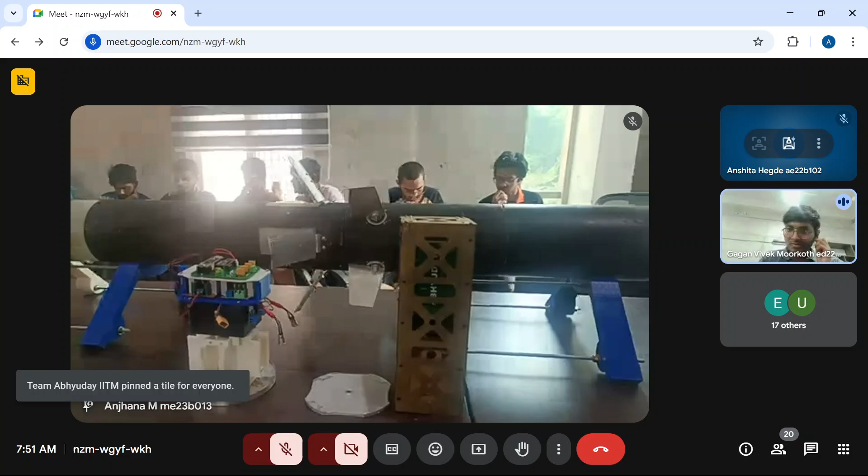What we are basically trying to do is, when we are recovering the rocket back with the help of a parachute, we are trying to take in air through suctions, sample the constituents of the air, and then send it out. This payload, which is in form factor of a 3U, is going to perform that task for us.

Anjhana, can you focus on the canard system once? You can go to the other side of the table. You can make it landscape and move a little back. You can relax, it's fine.

You can see a canard and air brakes bay over here. If that's clear, can you confirm it's clear in the video? Yes, I can see it.

So we have a canard bay, which is a modification of last year's bay. We tried to make some changes.

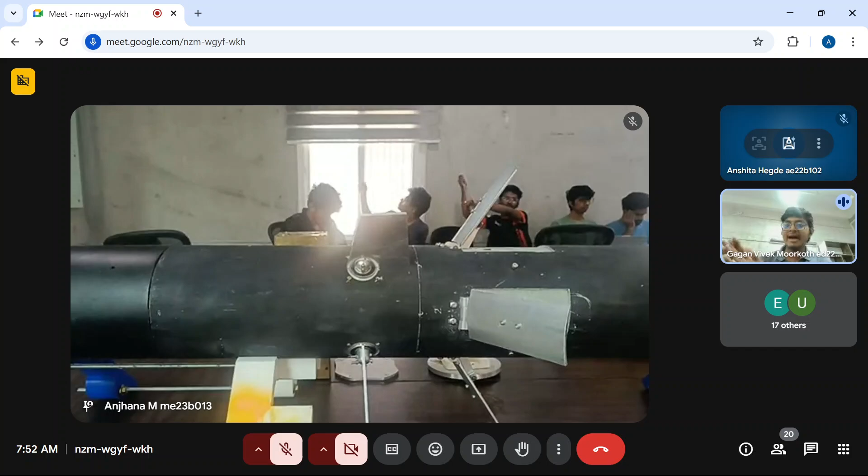Yes, I can. So the canard bay is a modification of last year's bay. Last year's canard bay failed, as the canard snapped off after a few seconds of launch. So we realized why that happened and made some structural modifications. At the same time, we also updated our software, basically the way we predict the roll and the way we control it.

Apart from the canards, we also decided to implement air brakes in this year's rocket. So the flaps you can see over here next to the canards are for air brakes. So this is the canard and air brakes bay.

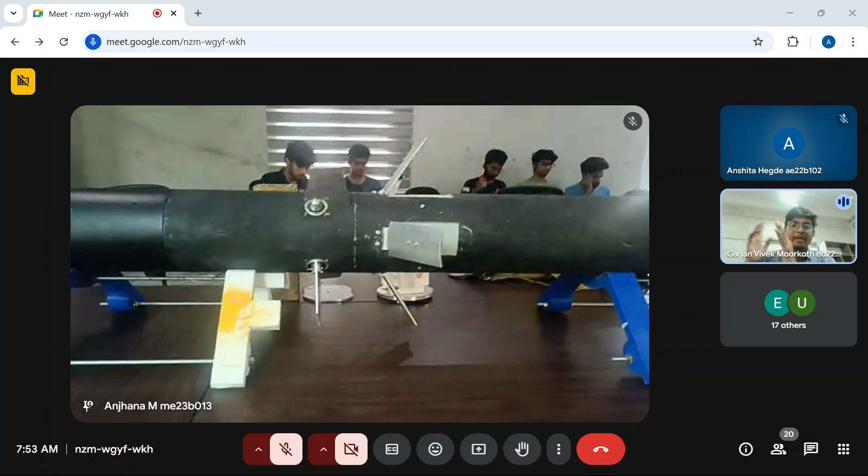Now, Anjhana, can you move back a little and zoom out? Following that, we have our recovery bay. Above the canard bay, we have our payload bay, then we have our avionics and recovery.

Anjhana, can you come to the oxidizer tank right now? Over here we have a nitrous oxide oxidizer tank. If you can come back a little more, we have a lower structure which will house the engine, and then we have the fins of the rocket.

So for this year's element, the fins are currently filleted. We are yet to perform a tip-to-tip layup of the fins, which we are about to do in the next couple of days. And at the end, we have a boat tail.

The boat tail is made out of aluminium. The rocket is primarily made out of carbon fiber, the internal couplers are made of glass fiber, the engine is made of aluminium, and the tip of the nose cone is made out of aluminium.

Now, if the externals and the brief overview are clear, we can dig into each vertical. We can come from top to bottom and detail everything about the rocket.

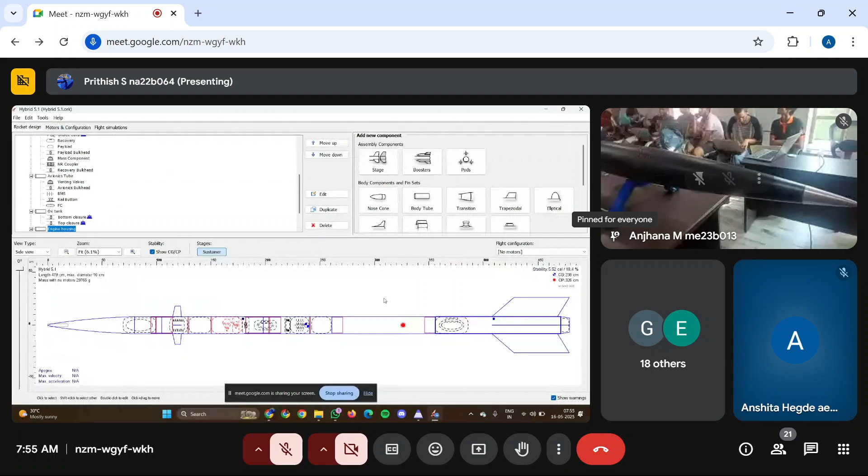Yep. So this is the OpenRocket file in which we have designed the rocket. Oh, am I not audible? I am audible. Okay, so this is the OpenRocket file on which we designed it.

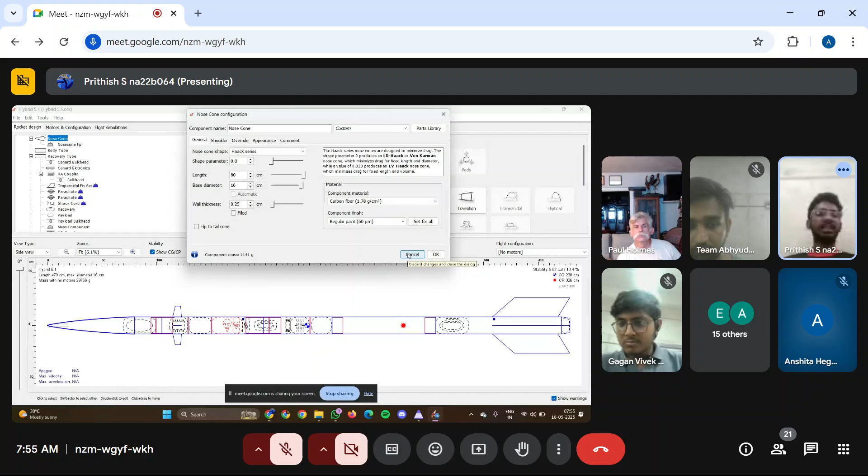So like Balaji mentioned, the nose cone is of a von Karman profile with a fineness ratio of 5, and it's given a wall thickness of 0.25 centimeters, 2.5 mm, which is regular for any kind of composite you go with. And like Balaji mentioned, the tip is aluminum for easier manufacturing.

Then, the nose cone tip is about 25 centimeters in length, and there's a nut inside the nose cone which holds the tip in place. So inside the nose cone is where we'll be having our payload.

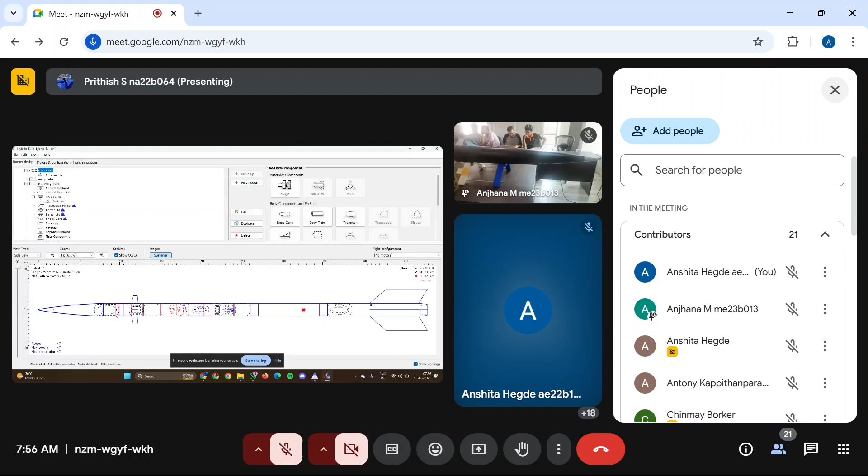About the nose cone, after the von Karman profile, we have extended it by 30 centimeters, and on the 30 centimeters there's a coupler.

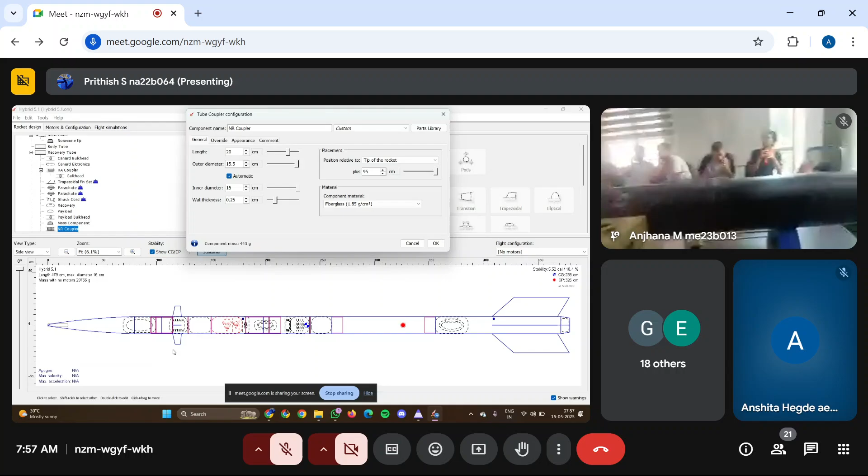The outer diameter of the coupler is around 155 and inner diameter is 150. The coupler is also 2.5 mm thick. On the coupler, 5 centimeters from the edge of the airframe, which is the nose cone, we have a payload bulkhead. That is the payload bulkhead we have designed, on which our payload would be sitting.

We also have cut edges so that we can epoxy nuts onto the other side while we are integrating the coupling of the two tubes.

Going down from that, we have our canards bay, which will be further covered by the control system, and below which we will have the air brakes.

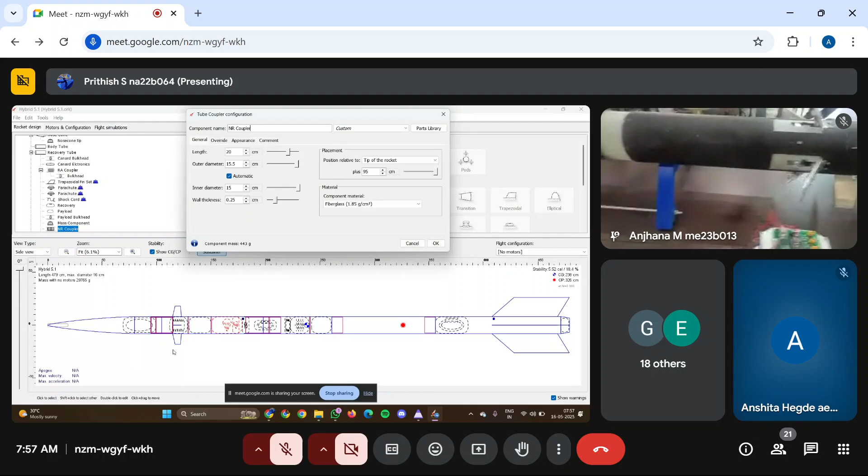Going below that is where we have a recovery bay. As you can see, there is the coupler over there, that is the point of separation for the rocket. The bay is about 53 centimeters in length, and it will hold a 12 feet Rocketman parachute.

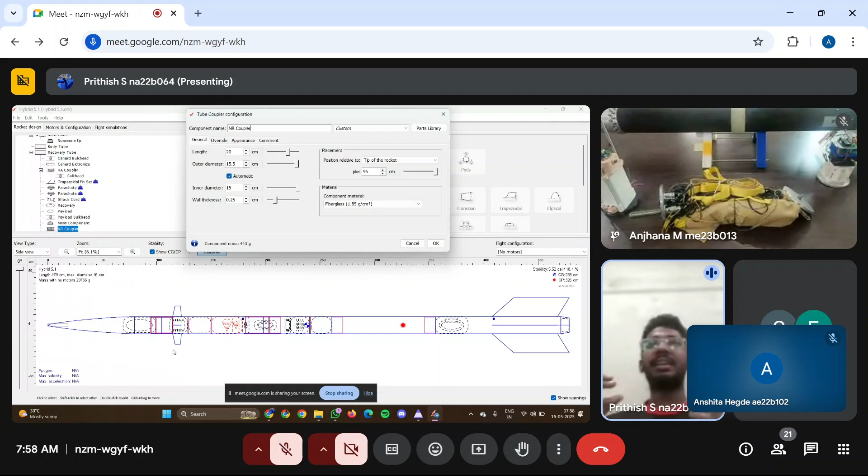The deployment is a single deployment, but dual event. At Apogee, the parachute will be deployed using CO2 canisters as main, and we also have a redundant pyrotechnic charge that we will use to deploy in case our CO2 mechanism fails.

On the table we can see the parachute packed along with the reefing wire and shock cords. Also on the bulkhead, we have our recovery system, the CO2 recovery system, and another tube for keeping our pyrotechnic charge. Below this whole assembly is where we'll have our rocket avionics.

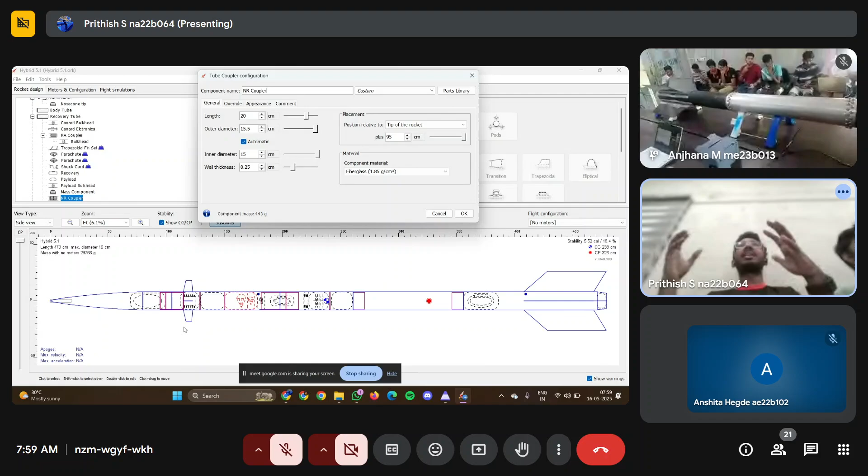This consists of our COTS and SRAD, and below which we'll have our aux tank and the vent assembly. Below the aux tank is where we'll have our engine and our feed assembly.

The fins of the rocket are right now just surface mounted, as in they have a 2.5 mm thick thin slab that will just go in, and right now it's filleted. For strength reinforcement, we are using about 4 layers of carbon fiber to reinforce it, tip to tip layer. For retention at the back end, we will have a boat tail.

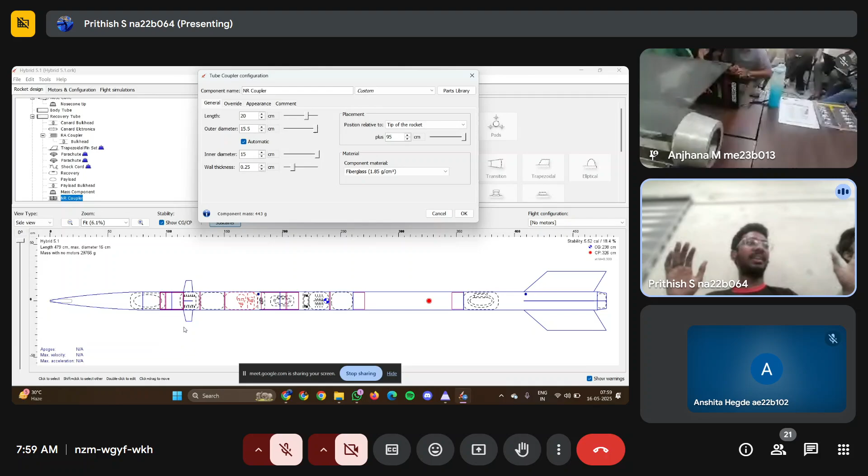So this is the complete overall look of the airframe and the recovery systems. If you have any questions, just let me know.

Where are your electronics located, and what is the airframe made of? The nose cone and the engine housing, that is the foremost end and the aftmost end, both of them are carbon fiber. The fins are carbon fiber. The two tubes in the middle, the recovery tube and the avionics tube, are both glass fiber. All the couplers inside are also glass fiber.

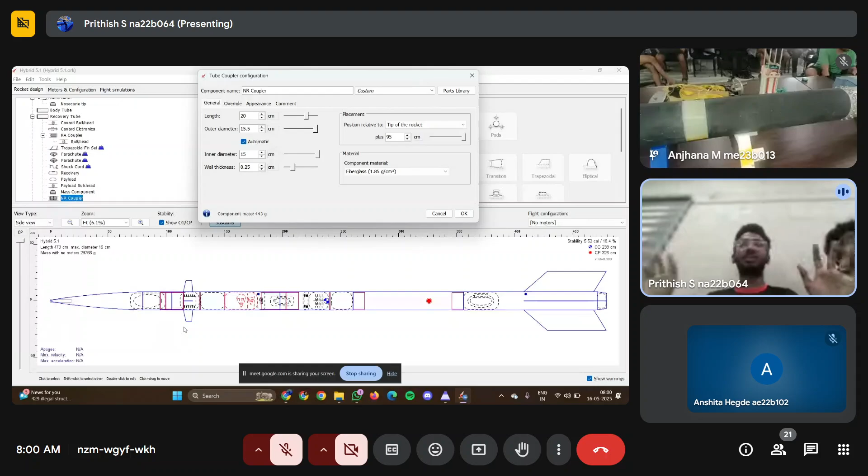I just wanted to make sure you didn't have carbon on your electronics. Yes, yeah, I know it's something you should know, but just wanted to make sure. I will hand it over to controls.

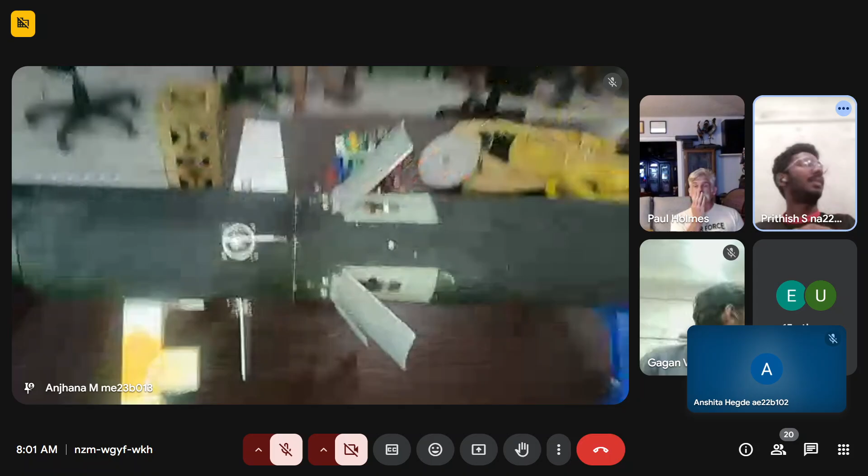Hello, can you guys hear me? Hi Paul, so this is the control system for the rocket. As Balaji mentioned previously, last year the canards sheared off at max Q.

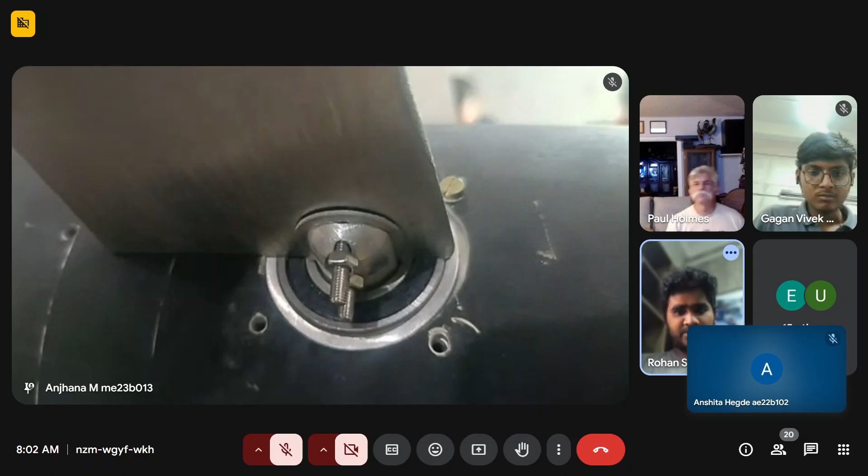To counter that, this year we've added bearings and made a custom holder for the bearings. I'm going to zoom in on that adapter. As you can see on the canards, there are bearings attached to support the loads it will experience during max Q, so all the loads will be taken care of by the body tube.

Below this, there's a bulkhead to hold all the canards, electronics like the servos and all the sensors. So this is the full electronics and servo assembly.

Below this we'll have the air brakes. The air brakes are actuated by a lead screw and a stage, and we have a DC motor below it. The motor will rotate the lead screw and the platform will move up and down, which will push the air brakes in and out.

To support this mechanism, we have four linear rods going through them, which will provide structural support while the air brakes are being actuated.

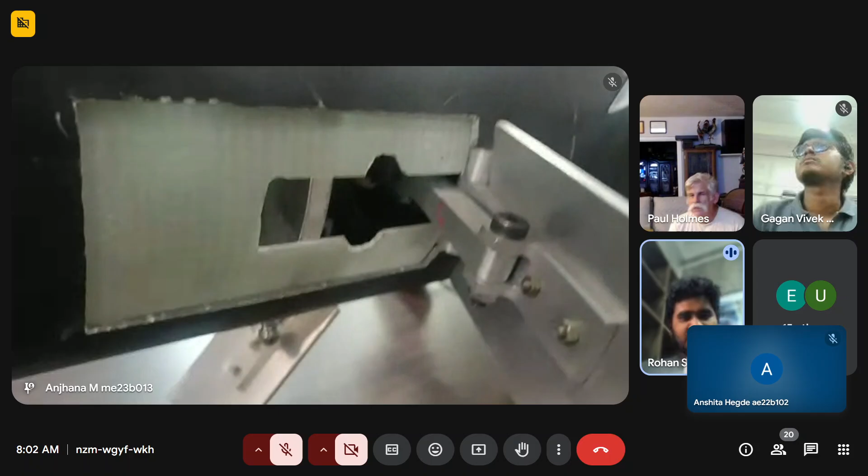If one of those air brakes fails, do all the rest stop? It's designed such a way that one of them will not fail, but in case they do fail, they will return back to their zero position. Okay, that sounds okay. Let's hope they don't fail. Let's hope they work.

So this is all about the controls part. If you have any questions, I'll be happy to answer. No, no, it looks straightforward to me.

Thank you. Also, just to touch on the fail safes, we have implemented a few fail safes. In case any of the canards breaks off, we will be able to detect it and bring all the others back to their zero position, just to get rid of any pitching. You always have a fail safe. Yeah, sounds good. That's all about the controls part.

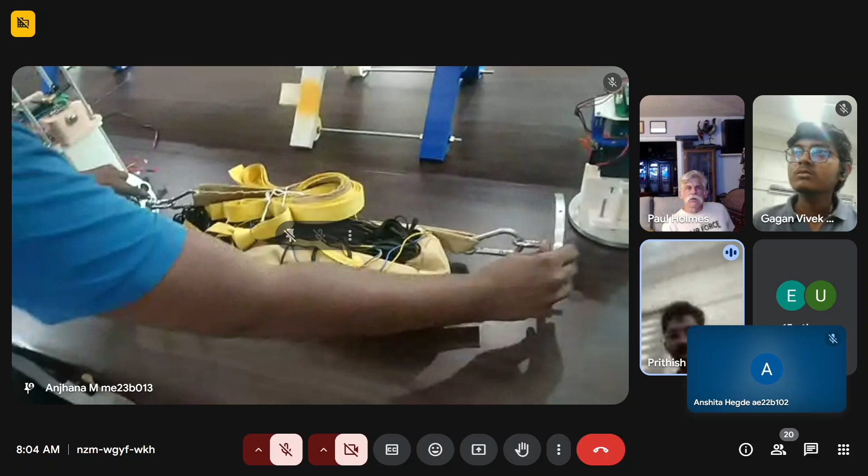I forgot to mention properly about the recoveries part. When it comes to the mechanical links, I'll show the pillar. On one side, we have a quick link connected to an eye bolt. On the other side, we have a U-bolt, a swivel link, and a quick link. Those are where the shock cords are attached, and about L by 4 of the shock cord is where the parachute is located.

Instead of tying the reefing line to the main line, we tied it to one of the shroud lines of the parachute, and we've also stitched loops in the parachute, with the reefing line going around that. The reefing ratio is 1.72, meaning the 12 foot parachute would be constricted to a diameter of 7 feet. There will be two Tinder Rocketry Piranha cutters.

One cutter will be connected to the COTS, and one will be connected to our SR avionics, so that just in case one of them fails, the other one fires off. The whole parachute will be packed inside the deployment bag, and outside the deployment bag we'll be stitching line stows so that the shroud lines are properly, neatly packed outside the deployment bag.

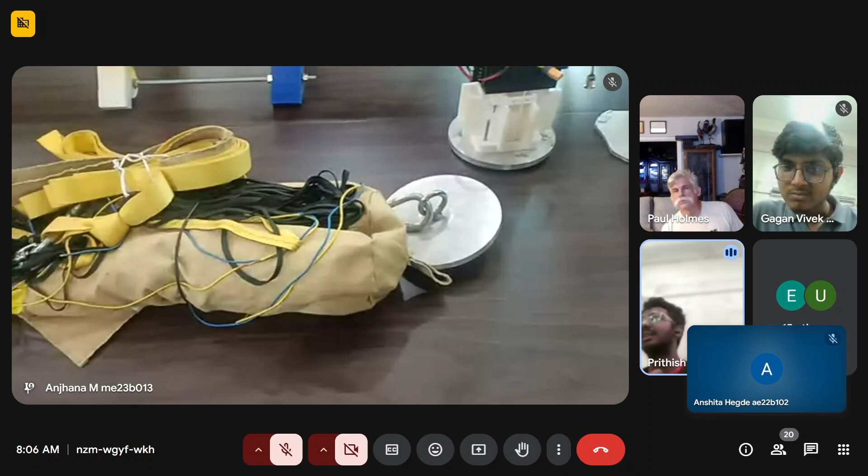And yeah, that's about the parachute deployment system. Okay, thank you.

As I mentioned, last year we went with a black powder recovery, but this year is the first time we're also trying to implement a carbon dioxide canister based recovery system.

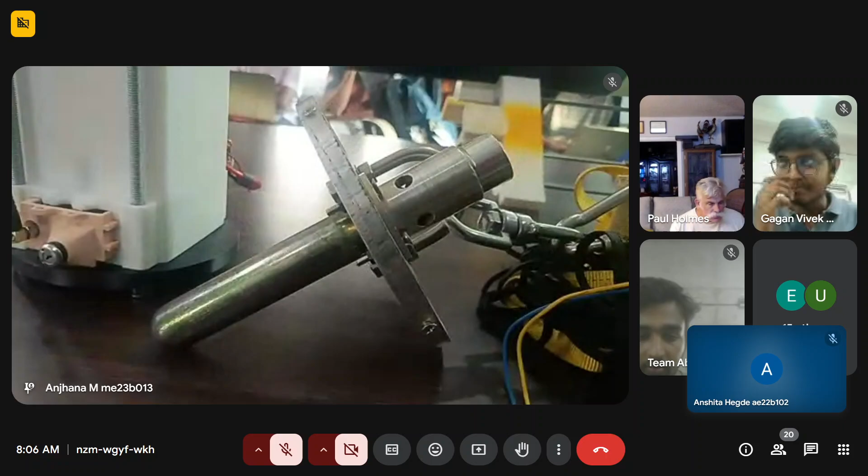So you're using one carbon dioxide and one black powder? Yeah, that's it. Okay. Yes. Sounds good.

If the system so far is clear, we'll now dive into the avionics bay and the flight computer. Okay, yeah.

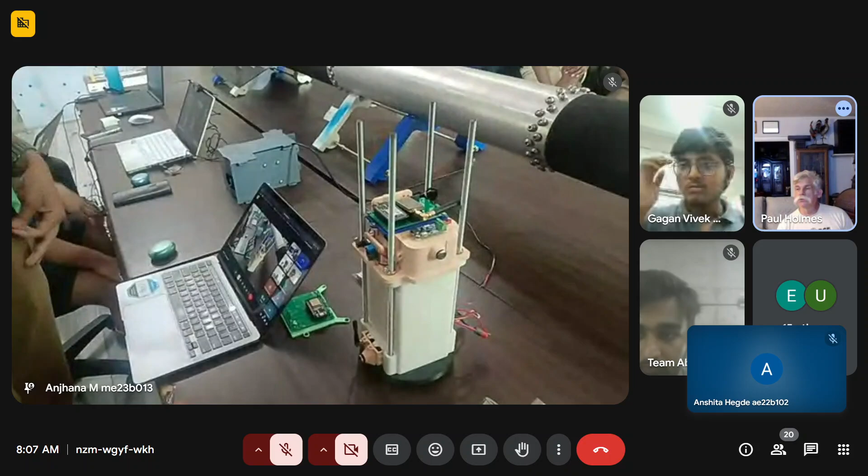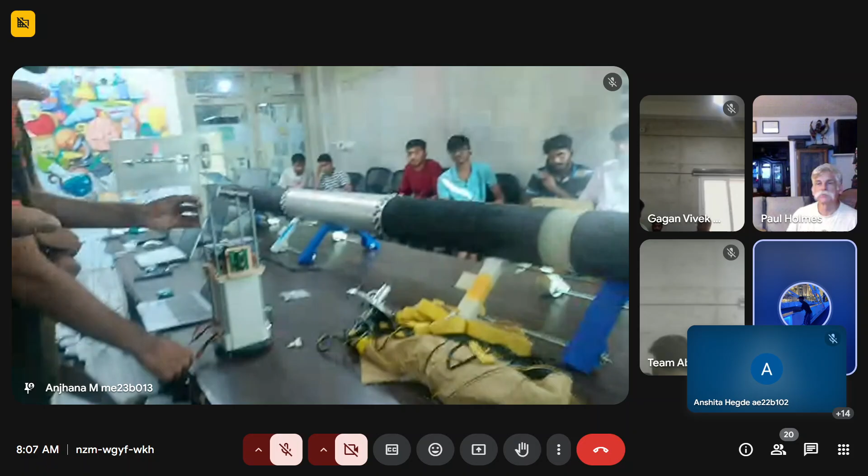Hello, Paul, hope we are audible. Hello, yeah. So as you can see, this is our avionics bay, and it consists of main components, which includes... can you keep it? You're very faint, can you see it properly? I can see, I can't quite hear though, it's very feeble. Can you hear me now? A little bit, yeah. Try talking, try talking now. Yeah, yeah. I connected it to me. Oh, shit. Hello, can you hear me? Oh yes, now it's better.

All right, so this is our avionics bay, let me go through the PCBs involved. This is our SRAT flight computer, and this is our SRAT telemetry PCB. This is our COTS altimeter, which is Blue Raven. And this is our battery bay, consisting of two 6,000 mAh, 12.8 volt lithium ferrous phosphate battery packs, which are BMS included. When combined, they produce over 24 volts.

And if you can see on this side, this little cabin consists of our... your audio died. Hello, can you hear me?

Now I can, yes. So as I was saying, this is our COTS GPS tracker, which is featherweight, powered by its own singular cell. All these components are powered by a 2s2p configuration of lithium cells. They're housed inside, and these are the wirings that involve them.

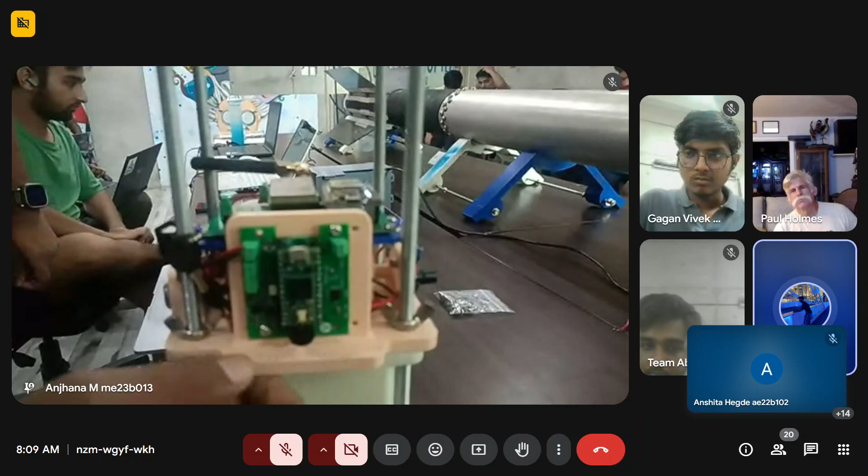When it comes to the FC, it has a myriad of sensors, including a BMP388, which is an altitude sensor, an ADXL375, which is a high range accelerometer, and a BNO055, which is a 9DOF IMU sensor. It has an accelerometer, gyroscope, and magnetometer which help us get orientation angles. The microcontroller implements the flight path logic and gives us pressure, temperature, acceleration, angular velocity data, as well as orientation. It uses data from the high range accelerometer and the 9DOF IMU sensor, combining them using sensor fusion to provide orientation and altitude.

So when it comes to the telemetry PCB, yeah, I'll be taking over here and explaining the telemetry module. Hope I'm audible.

Hello, am I audible, Paul? Yeah, I can hear you.

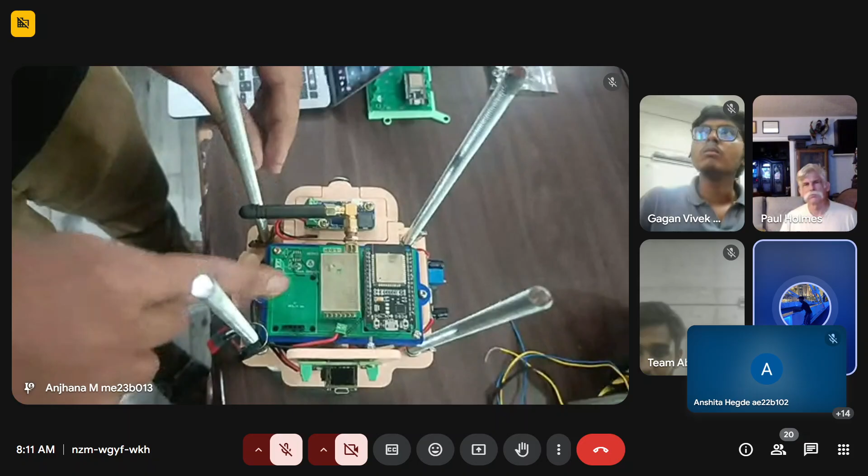This PCB right here is the one that controls the valves connected to the engine and the aux tank. We call it the engine dev PCB. This again is controlled by an ESP32 microcontroller, and then we have a few buck converters to convert the voltage according to the valve's needs. We have a MOSFET relay right here, which is used to control the NO valve. It acts as a key switch and controls the NO and NC solenoid valves. Okay, that's it for the avionics.

Do you have any questions for us? The big battery in there - what is its chemistry, what kind of battery is that again? So this is a LiFePO battery, lithium ferrous.

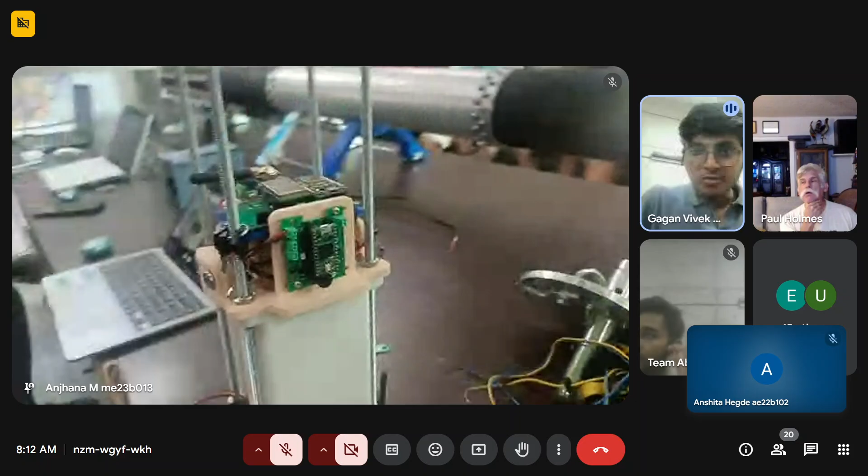So, Paul, should we dive into propulsion right now? Our propulsion system and fuel station. Yes, can do, sure. So Rohit and Vishnu will take over. They will be detailing you regarding our propulsion system. Feel free to interrupt us at any moment to ask the questions that you might have.

Hi, Paul, I'm audible, hello. Yeah, so this is Vishnu, I'm leading the station along with Rohit. So I'll be explaining you the tank part, oxidizer tank part.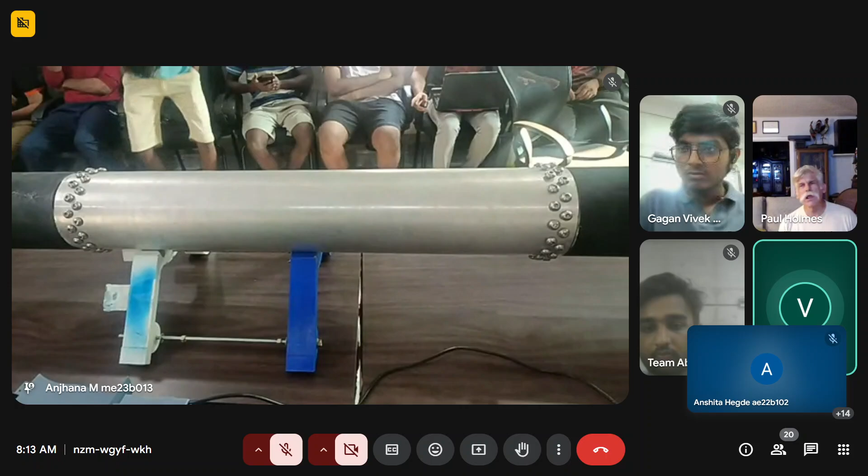So the oxidizer tank has three parts, like a bulkhead, cylindrical section, and then another bulkhead. Each bulkhead will be having two ports. The upper bulkhead will have a vent line and then a PT port. The lower bulkhead will have a feed line and then a fill line port.

So the upper part, which consists of vent line, it has a PRV, pressure relief valve, and then a normally open solenoid valve. The PRV opens at 80 bar pressure, and the normally open solenoid valve will open if there is any power cutoff or anything. So now we'll be showing you the fill line.

One second - vent line. So along with that, we have a port for a pressure transducer over there, which records the pressure readings of the tank and then gives us the live feed as well.

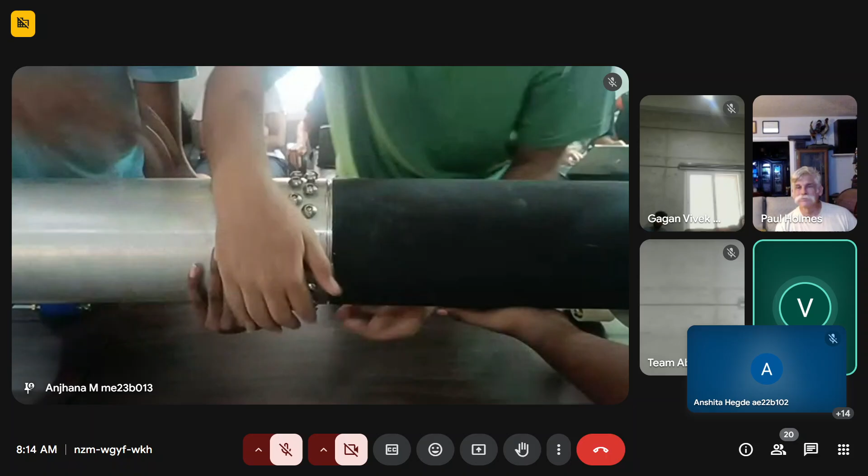Also to mention the materials, this tank is made up of AL6082. The cylindrical section is made up of AL6082, and the bulkheads are made up of AL6061. So this tank is rated for 70 bar - we designed it for 70 bar with a factor of safety of 2, and then we tested with 100 bars of continuous pressure for around 5 minutes, so it is leak proof. Each bulkhead will have two O-ring slots, like two O-ring grooves, which will be leak proof.

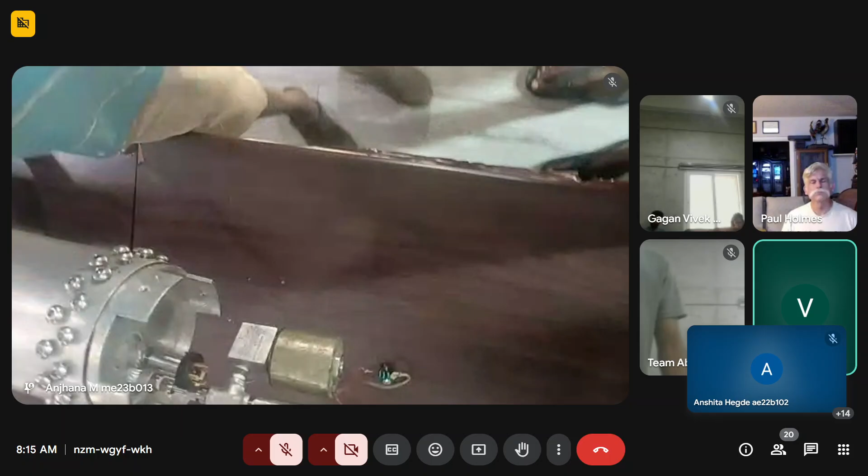As you see, that is the vent line, which consists of a PRV - the L-shaped one is the PRV, and then a solenoid valve, normally open solenoid valve. Below that, we have a PT port, which will host the pressure transducer, helps in recording the pressure readings, and then helps in monitoring the pressure readings.

So this entire length of the ox tank is 900 mm with an OD of 160 mm and then ID of 152. The thickness of the tank is 4 mm, which will be connected to 17 bolts at the top and then 17 bolts at the bottom, which is of M10.

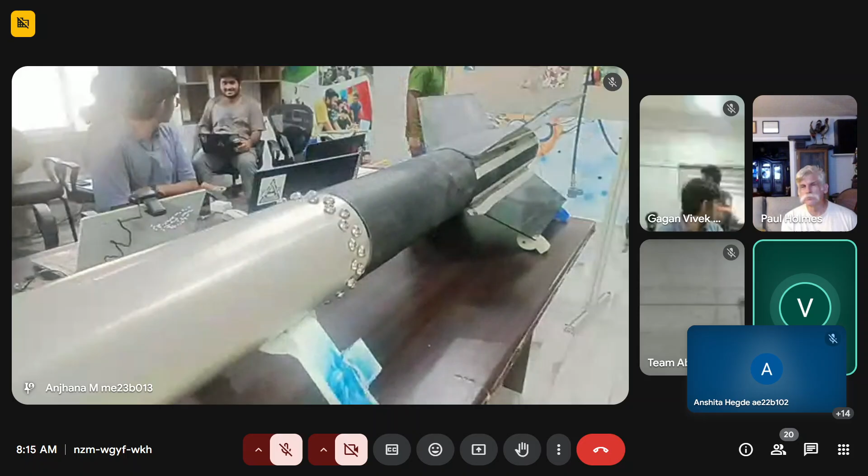Now coming to the bottom of the tank, we have a feed line and then fill line. The feed line is currently of half inch, it consists of half inch seamless tube sections and then a servo valve, ball valve, which is controlled by a servo.

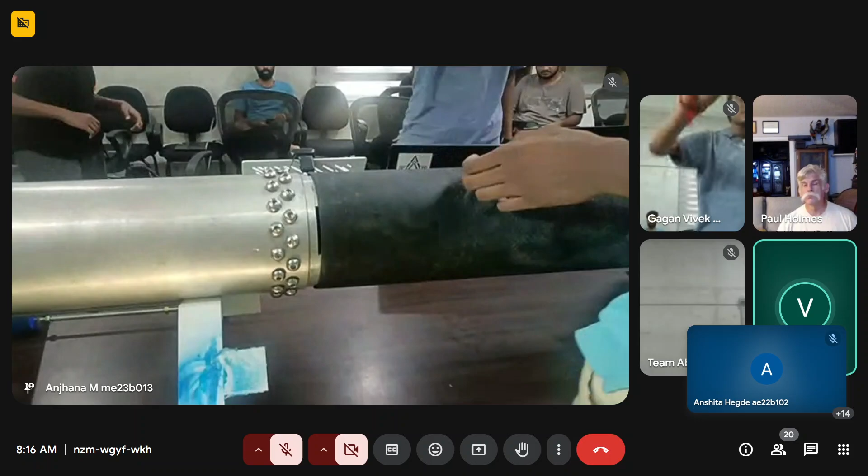And then coming to the fill line port, it will have a QD, quick disconnect, and then an NRV section, non-return valve. Currently we'll be showing you the feed line and then fill line.

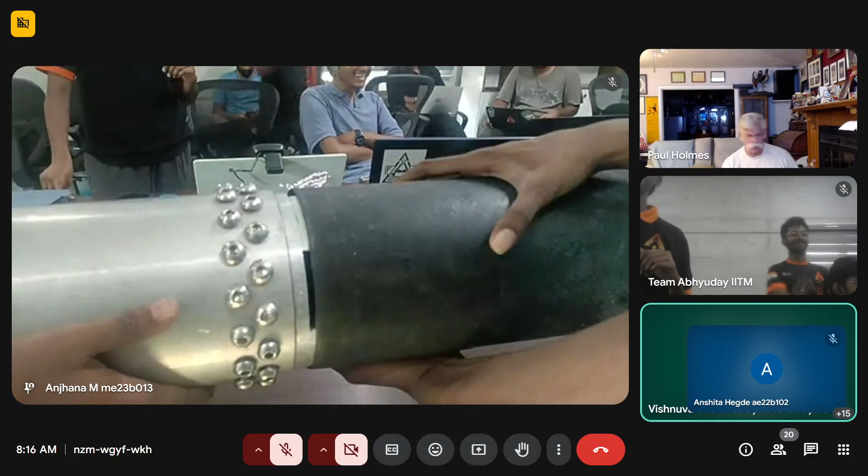To mention the capacity, it is of 15-liter capacity - the tank is of 15-liter capacity. Along with this, we have a quick disconnect housing, which helps us to disconnect after the filling.

Can you just show me the quick disconnect section to the cam? To the cam - it's actually the filling. One second.

So as of now, if you have any doubts, you can ask me. Paul, now we'll be explaining you the fill line.

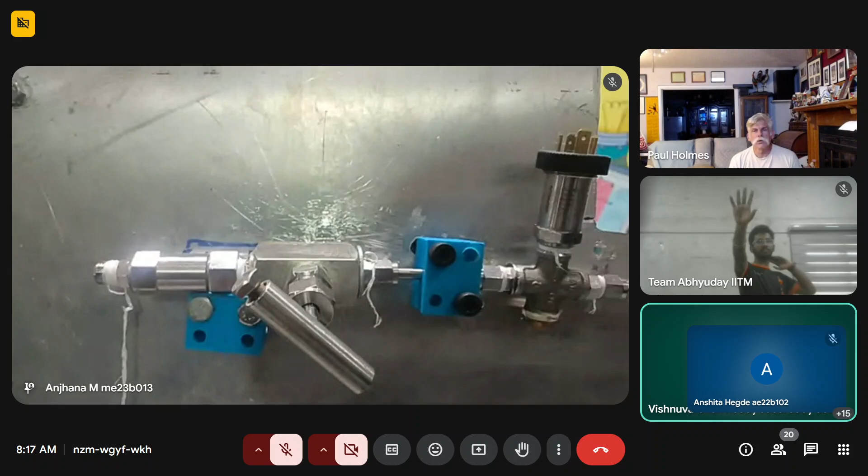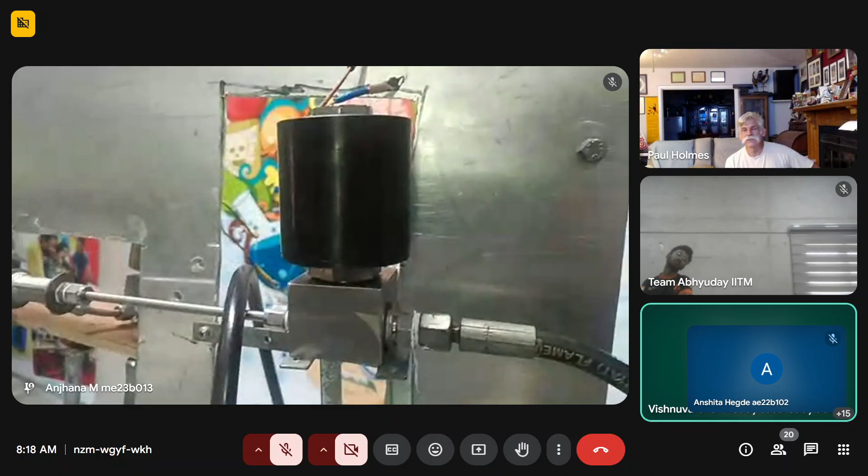I'll explain the fill line. It consists of an NRV (non-return valve), a needle valve, then a pressure transducer port, a PRV (pressure relief valve), and a manual vent line which has a needle valve. To vent using power, we have a normally open solenoid valve, and to fill and control the flow, we have a normally closed solenoid valve. This is our fill line.

If there is any power failure, the normally closed valve will remain closed, and the normally open valve will remain open, venting the entire tank.

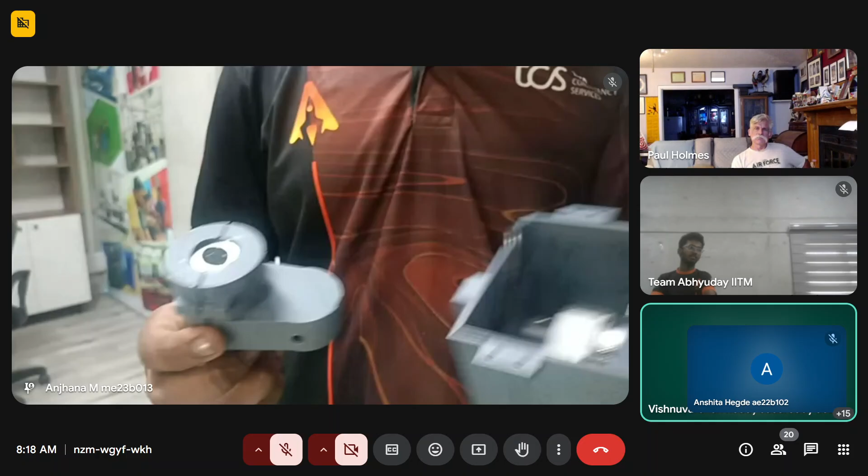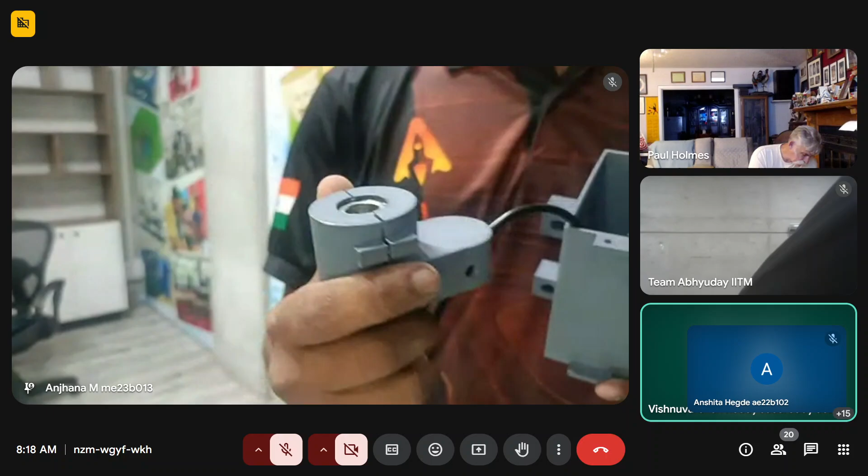For the connection between the fill line and the tank, we have a quick disconnect mechanism with a linear actuator and a female end of the quick disconnect section. As you see in the cam, that's the female end of the quick disconnect system, which connects to the male end of the fill line in the tank. The linear actuator helps to disconnect after filling. I hope you are clear with the fill line.

Yes. So now I will be showing you the feed line and the fill line at the bottom of the tank.

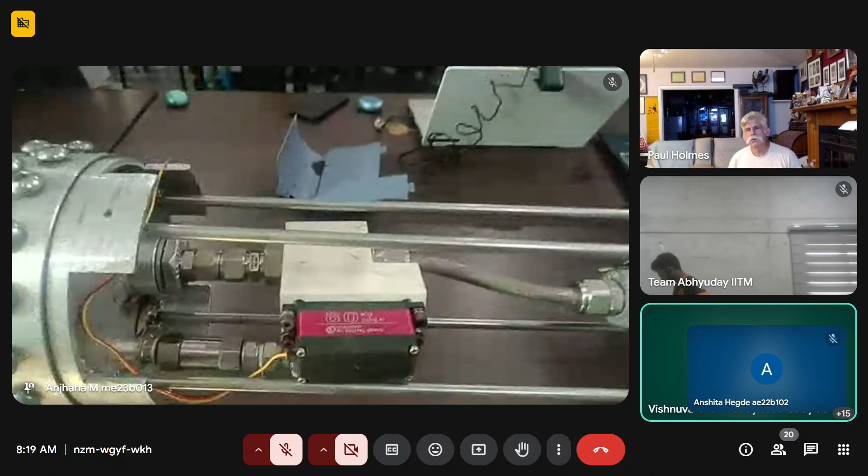As you see, we have a motorized ball valve controlled by a servo, which is half inch. All the seamless tubes are half inch, and this half inch section is connected to the injector bulkhead of the engine.

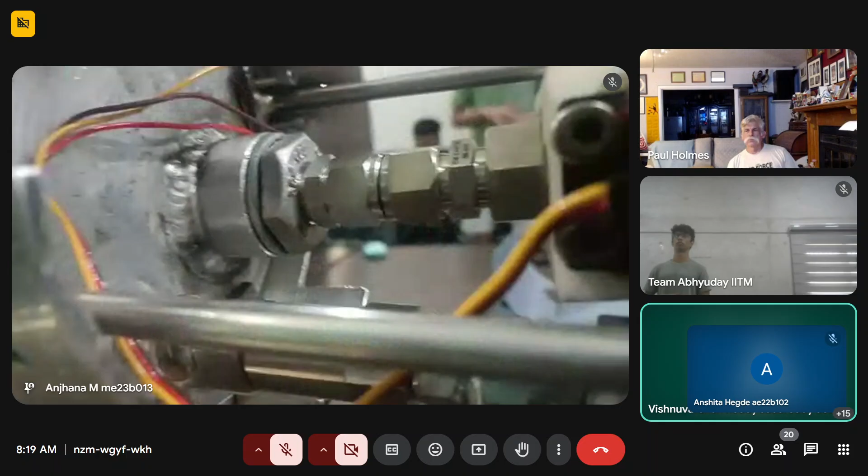At the bottom port, we have one more port for filling, which has a male QD system, a Swagelok elbow, and an NRV (non-return valve) to prevent backflow after filling.

As of now, do you have any doubts regarding the fill line and the tank? You can ask me. I don't have any questions right now.

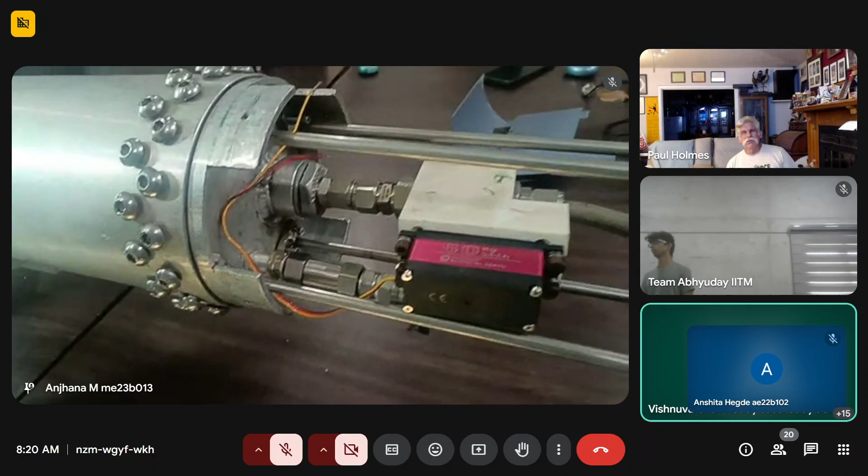Okay, so now Ashish will be explaining the engine part.

Hello, Paul. Am I audible. Right, so the engine here.

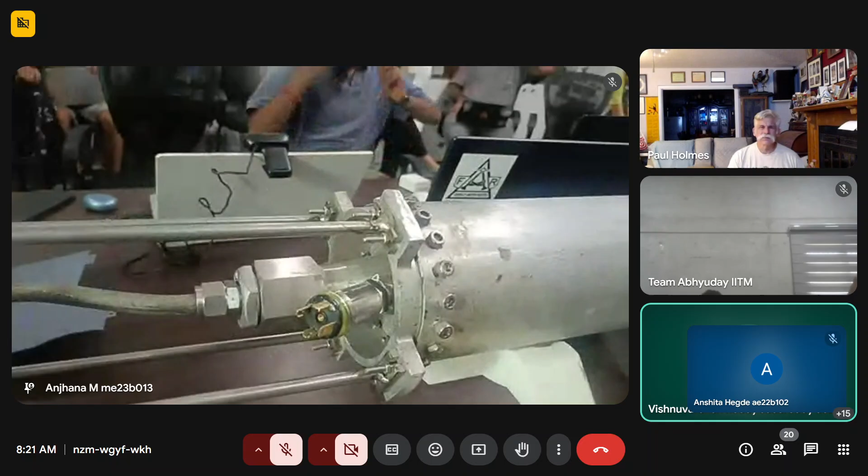We'll start off with the injector bulkhead first. The engine bulkhead uses bolt designs in both of our bulkheads. The injector bulkhead has flanges which connect to the longerons, which are the load-bearing members, and this transfers the thrust from the engine to the actual airframe. We are also using a half-inch injector design here.

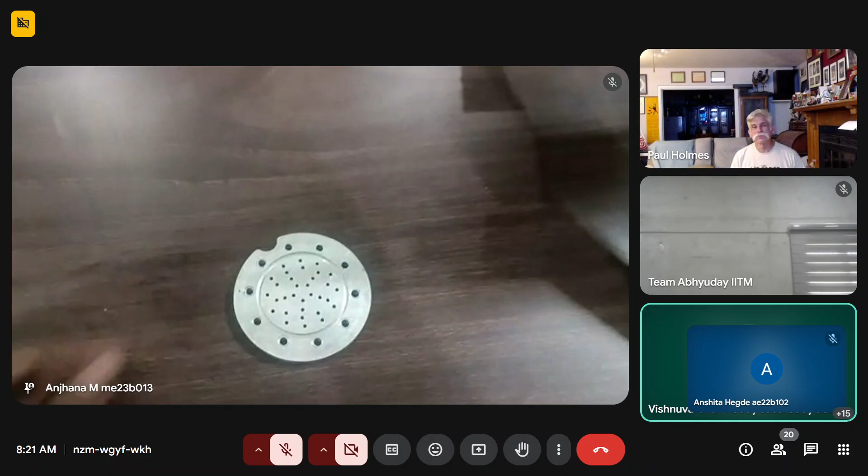We have two pressure transducers for data acquisition as well, one pre-injection and one post-injection, to get the injection pressure difference and the pressure drop across the injector. The injector plate design we are using is customizable, so we can implement any design needed and just bolt the injector plate onto the injector bulkhead.

Between the smaller injector holes and the bolt holes there's an O-ring groove to leak-proof the injector plate and the flow. We've also implemented a swirl design in our injector plates. The holes are radially rotated 10 degrees such that half of the holes are clockwise and half are anti-clockwise, to induce a swirl effect and enhance atomization of the liquid N2O being injected.

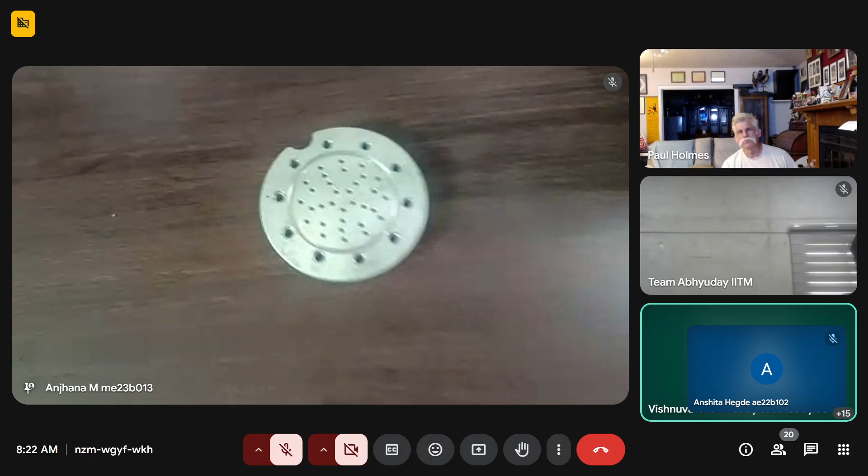Do you have any questions? No, that looks good.

Okay, so we'll move on to the nozzle bulkhead. My bad, the nozzle bulkhead, to accommodate the boat tail, has threads on it, and again we are using a similar kind of bolt design here. We have not attached the bolts as of now. If you give me 2 minutes, I will show you the nozzle as well.

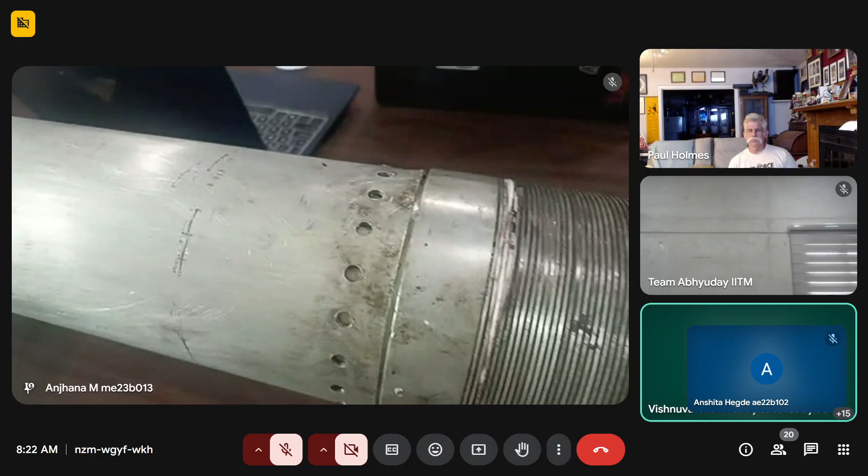Yes, can do. Meanwhile, if you have any questions regarding the verticals or anything. Nope.

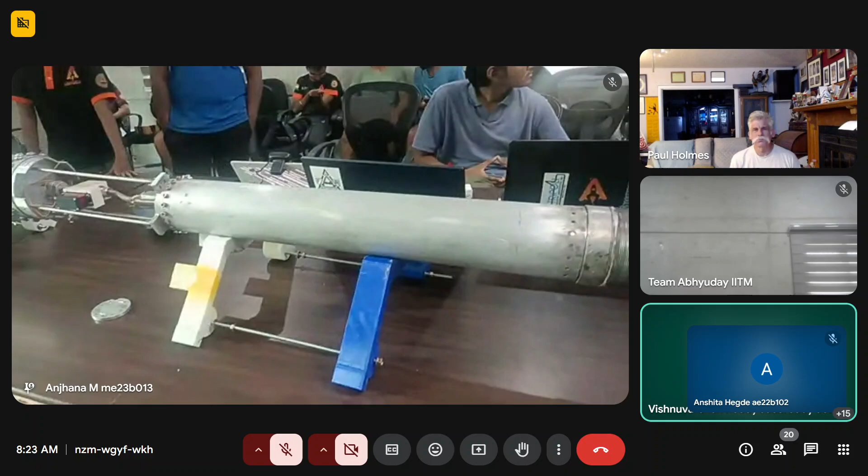I would also like to brief you about the thermal insulation we are using inside the engine. We are using a phenolic-based thermal liner between the combustion chamber and the aluminum casing. Moreover, talking about the fuel we're going to use, it's 400 mm lengthwise with a radial port of 60 mm, and we are using a paraffin-based design.

We are using our own patented design, accommodating something called EVA. My team member is also sharing their screen now, and we are going to share the cross section of the actual engine.

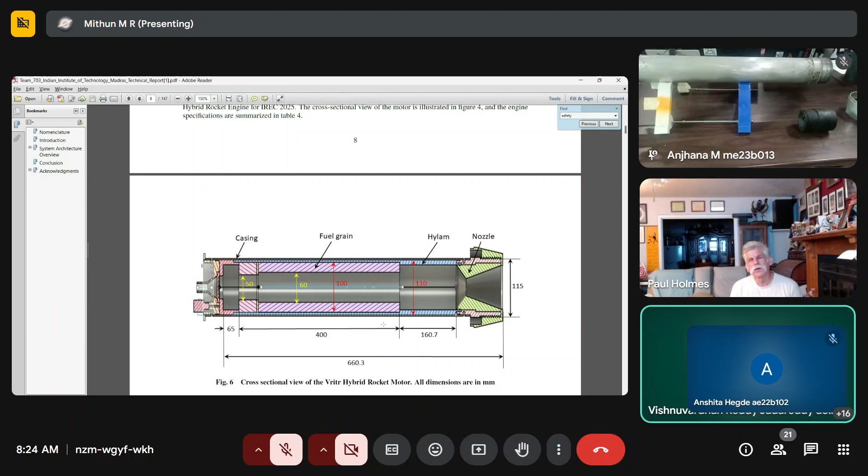So I was talking about the additives that we have added into the fuel. EVA is there just to provide structural integrity, so as to prevent clogging from happening.

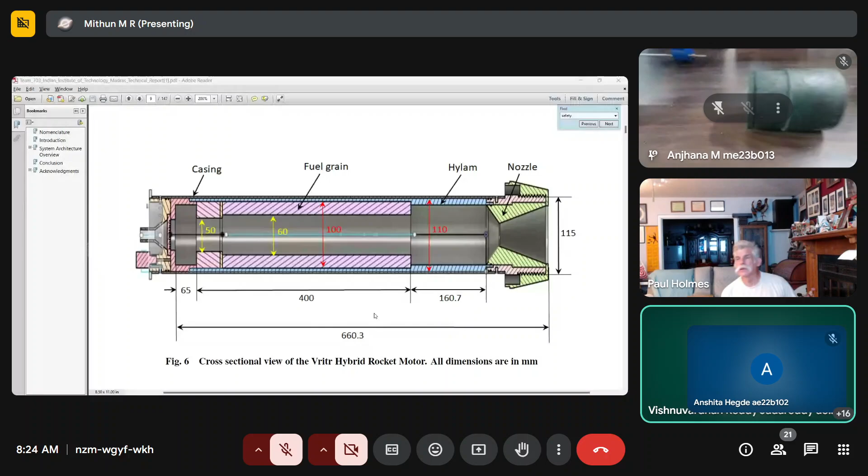Are you able to view the camera right now? Is the view clear? Yes. So we are using a graphite based nozzle in our design. It has an expansion ratio of 6.92 if I remember correctly, a throat diameter of 35, and a design pressure of 35 bars.

Right now, the nozzle that we are showing you was used in a static fire, and the lip of the nozzle is broken. We have given two more sets of nozzles for manufacturing, which we are going to take for the competition. The nozzle is going to be fit inside and held inside with the boat tail.

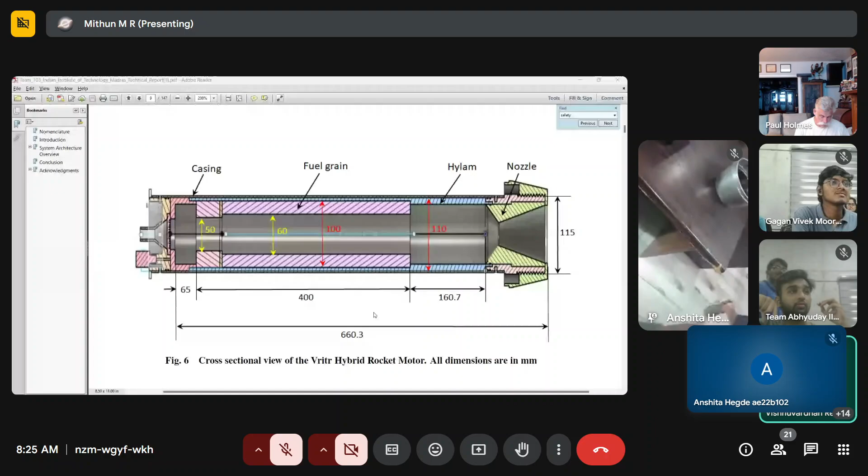Okay, so we'll move on to the cross section of the engine. Before that, I would like to ask you if you have any questions.

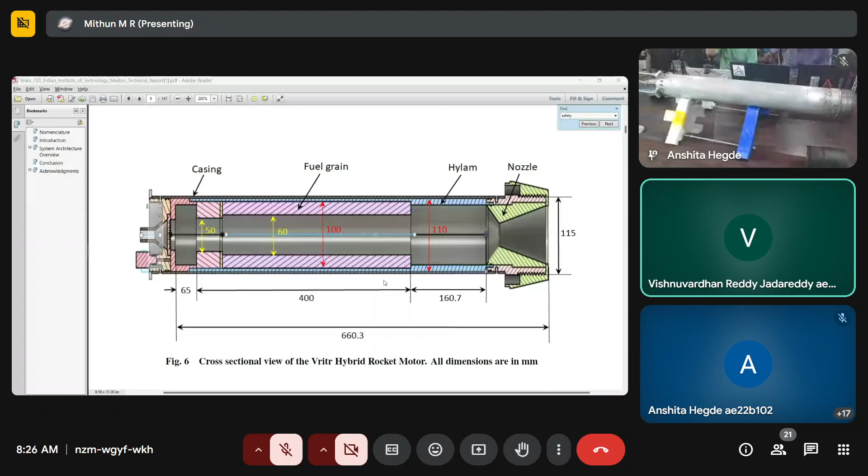In the engine, we have implemented a pre-combustion chamber and a post-combustion chamber as well. Another highlight of our engine would be the igniter puck that we are using. It's an RNX-based propellant, which we use to ignite our engine and heat up the oxidizer flow and sustain the flow as well. We have initially a 65 length pre-combustion chamber.

After that, we have an RNX propellant grain with an ID of 50, again RNX based. Then we have the fuel grain with an ID of 60, an OD of 100, and a total length of 400. After that, we have implemented a post-combustion chamber of 160.7 length, and as you can see in the blue color here...

Yes, the blue color, it's my bad. The post-combustion chamber is 160 and the ID of the post-combustion chamber is 110. So the blue colored part is the phenolic part, which is the thermal liner that we are using.

And to create a pressure seal, we have implemented a primary and secondary O-ring groove design into the nozzle end. The nozzle has a phenolic lip that fits into the nozzle, which is going to create the pressure seal.

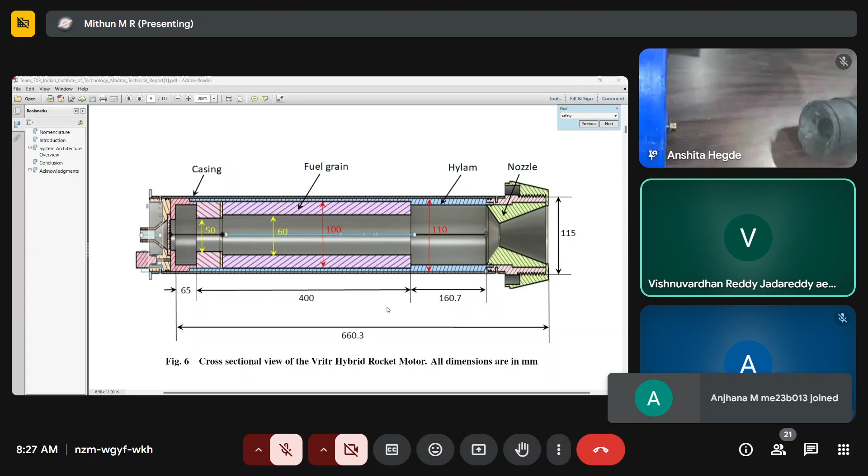If you can see in the camera, there are two O-ring grooves that would go into the Hylam lip to create a pressure seal in there.

Towards the injector bulkhead, we have also implemented a head end phenolic head end, which would go on and create a pressure seal with the Hylam casing and with the injector plate.

I've covered most of the boat tail. The boat tail and the nozzle, the boat tail is going to be, as you can see on the engine, the load bearing component for holding the nozzle inside.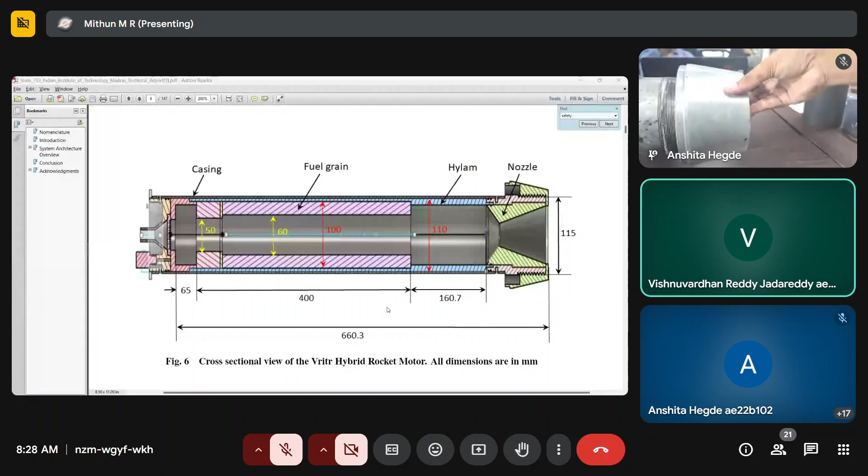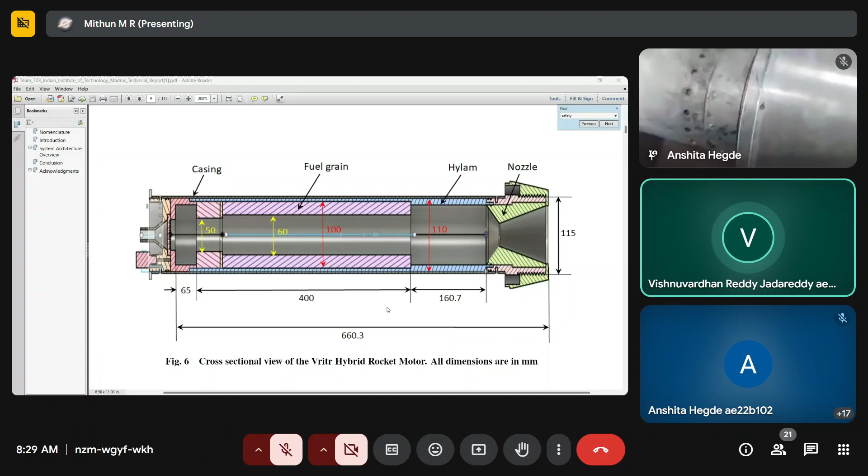We're going to use the boat tail to hold the nozzle in the engine itself. The boat tail is also going to help us center the engine with the airframe. The shoulder fits with the ID of the airframe.

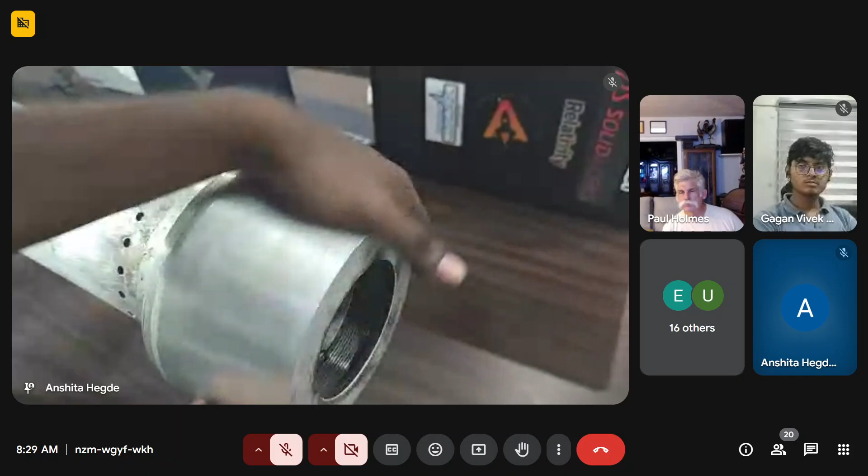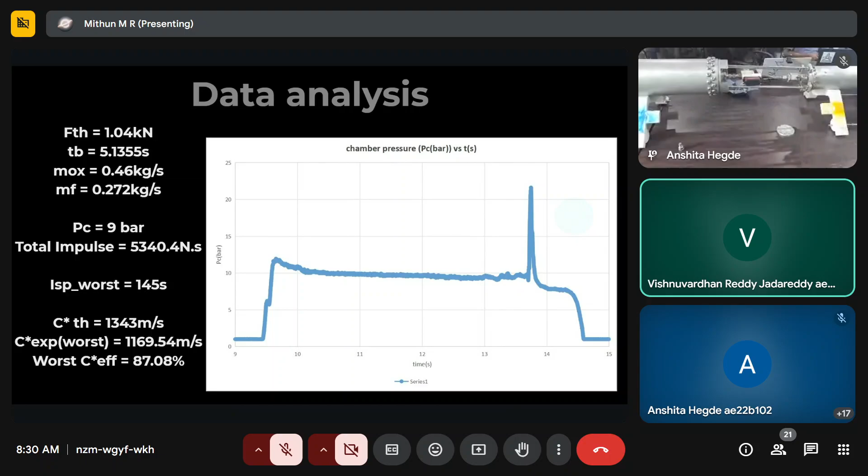This was the chamber pressure, and this was the thrust that we were able to achieve, an average of 1 kilonewton. However, this was with a half inch feed line with a check valve.

We realized the check valve was causing drastic drops in the mass flow rates, so we have removed the check valve, and we have conducted another static fire without the check valve.

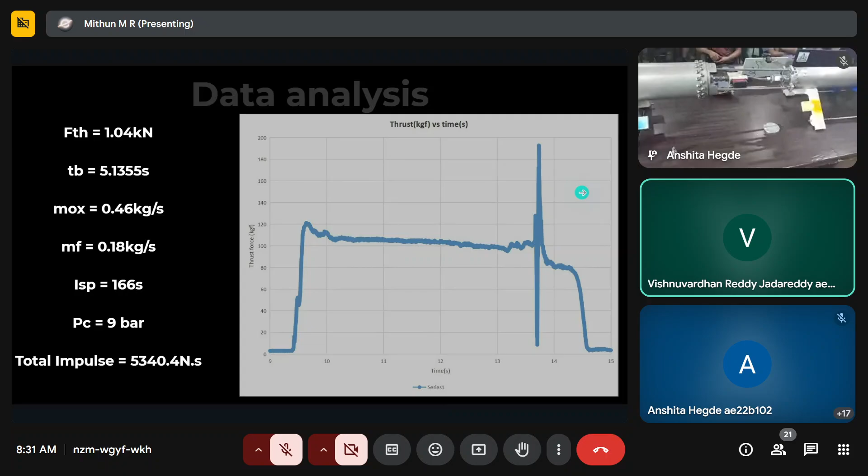Did you have the thrust? Just give me 1 second, Paul. Okay.

We'll share the footage of the static fires we've had so far. We'll share our screen and show you the footage. We static fired the engine twice. We'll just share you the footages.

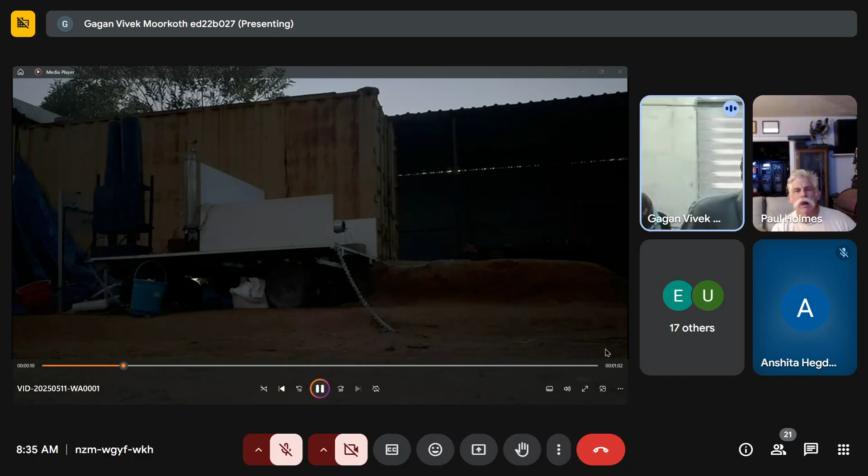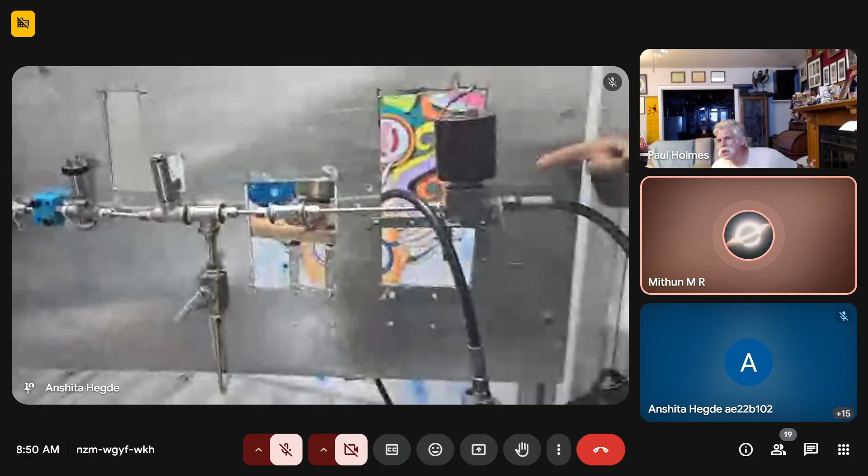As you can see in the fill station, we are making use of two solenoid valves as part of a fail-safe mechanism. In case of power failure, the NC valve in the fill line will automatically close, shutting down the oxidizer flow, and the NO valve in the vent line will automatically open, venting out the oxidizer. During recent testing we found a few issues with the solenoid valves, and if it persists in the US as well, we are planning to replace them with motorized valves.

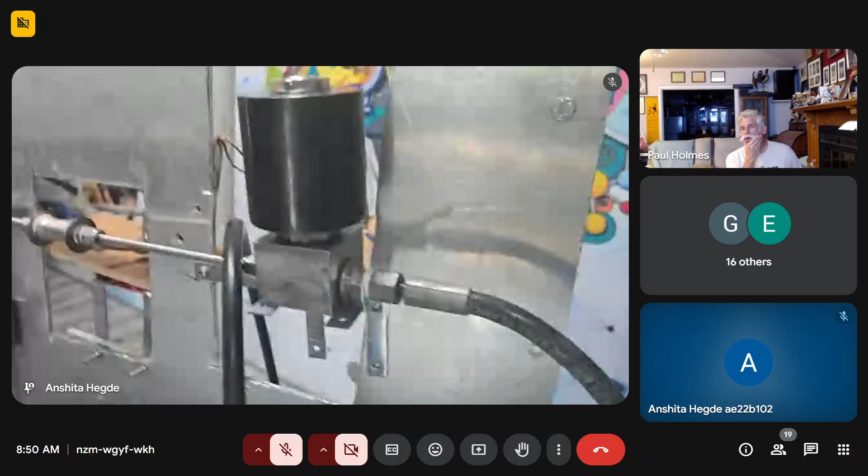Is it fine, replacing the solenoid valve with motorized valves? Are you talking about using something like a motorized lever arm?

A control valve, not a manual valve, but a servo control valve, which can be accessed remotely. It's a servo assist valve.

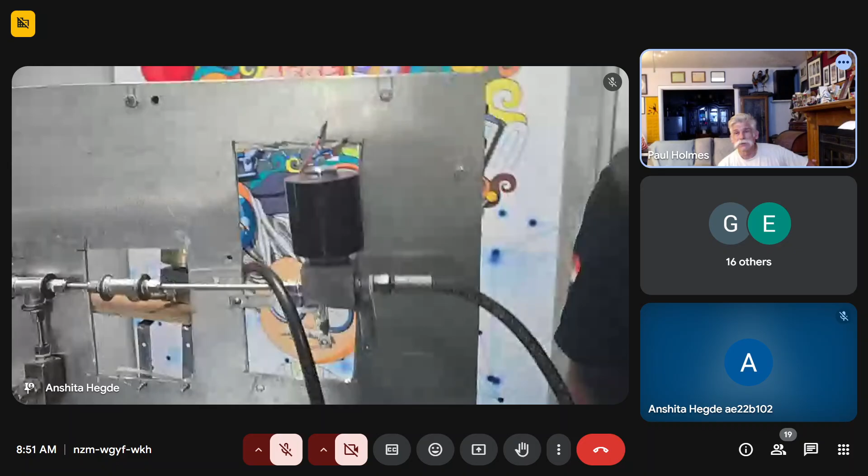I would have to see a picture of what you're thinking about using, just to verify. This is the kind of valve I was mentioning, a valve actuated by a servo motor. Oh, so you're talking about having one with an integrated motor. Correct. Okay, yeah, that'll be fine.

So that's your fill valve that you're thinking about motorizing? Yes. That can still be activated remotely using a telemetry module.

If you have an issue where you've got to turn it off and it's left open, is there some way to turn off the fill tank? The only thing I don't want is if you open it up and then it dies - how is it going to auto close? That's one thing to worry about.

But since we're using battery pack systems, I don't think there should be any power failure to worry about. We have telemetry people who can explain that better.

Manish, I need to think about this. I'll get back with you, or get back with Aaron or Don, either one. Okay, got it.